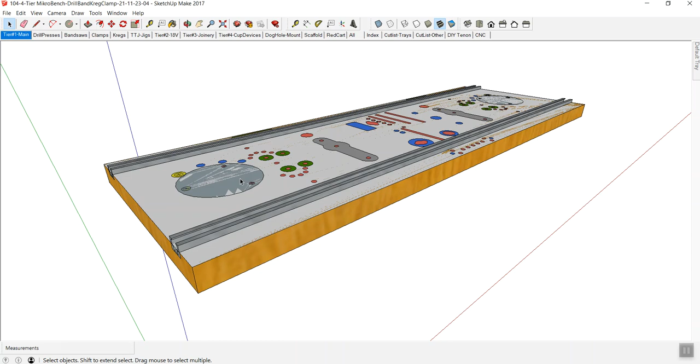So this is the board, or what looks like it's going to be the board that we're going to run on the CNC machine. This track, by the way, I'm going to hide right now. Okay, these are going to be the dados for that track. They're going to be done on a shaper, a separate machine. And then I'm going to hide the surface, the two-dimensional CNC run.

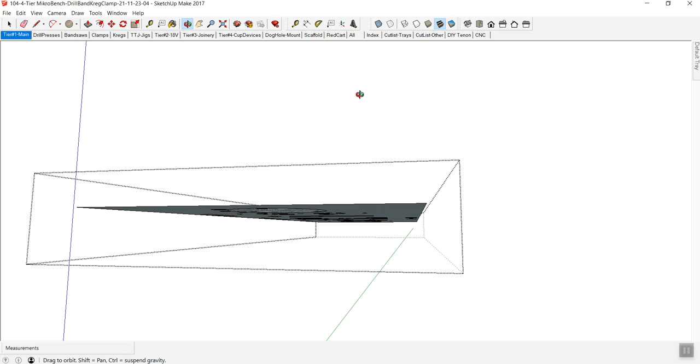You can see that this is really just a board. It has the two dados in it. Don't worry about the circles. Those are for references later on a drill press thing. But if you look at this again, now I hide the board itself. And so when I'm doing all this layout stuff to see where everything is going to fit, I basically keep this two-dimensional board going.

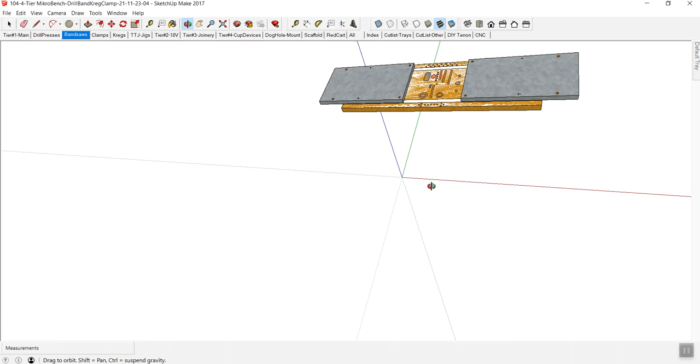And so when I do my layouts, like for this kind of stuff, these are the drill presses. I need to know where they're going to fit. I want to be able to show the bandsaw brackets, the clamps that are going to go on here. When I do all that, I like to be able to physically see the board, especially when I get into the bracketing underneath, basically the mounts that are going to be used for different mounting systems, scaffolding, toolbox mounting, and things like that. I want to be able to see the board itself.

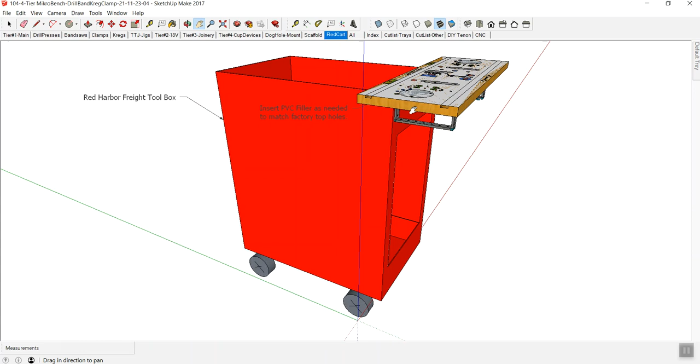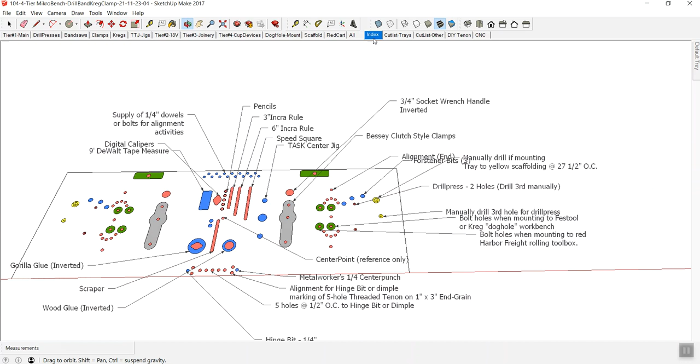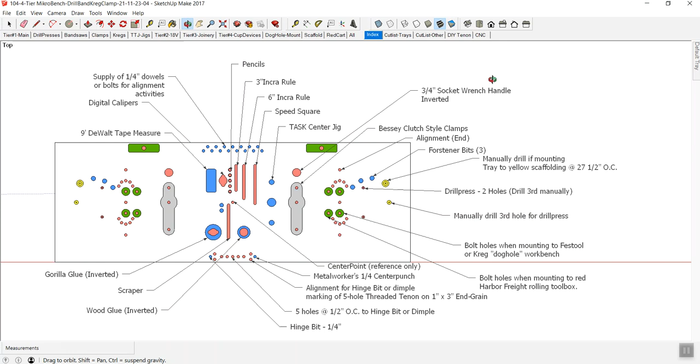But when it really comes down to the CNC part and over to VCarve, I just want a two-dimensional item. So this is an index. It's horizontal landscape mode because I can fit a lot more on it, left to right, and do all my notes. And this is more for the people using it, myself. But when it comes to the CNC, I have a separate group over here.

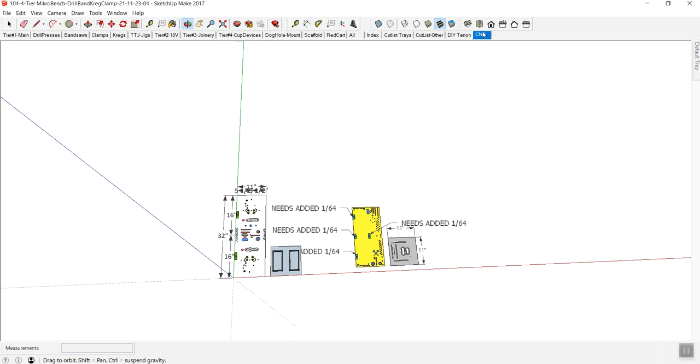So if I zoom out and I do view hidden geometry, you're going to see that I've got tons of stuff throughout this whole model. There's that bench over here. Here's some other stuff going on, but there's a lot of stuff out there. But when I click on this CNC tab, it hides everything else, and all that's left is this one group that has all my CNC stuff.

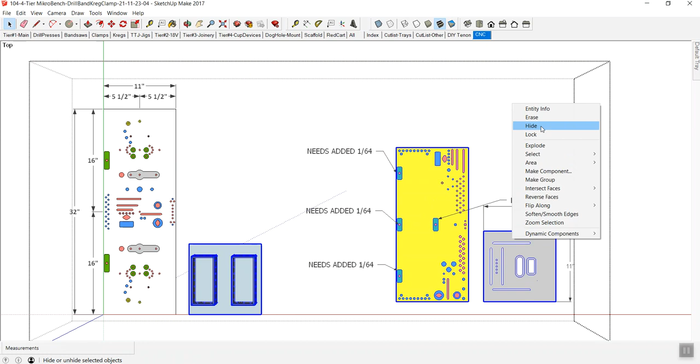Then inside that group, when I'm preparing for receiving it in Vcarve, I take even the things that are inside of there. So I'm going to control click, control click, control click, and then right click, hide. I do not need to hide the notations or the dimensions because those will not carry over to VCarve. Basically what I'm left with is this board right here, a two-dimensional thing. It's not a three-dimensional thing, okay? Because three dimensions does not work out well in Vcarve. This is my solution to the whole thing.

And if you notice, this board is 32 inches high, so the halfway point is 16 inches. So when I put that board on the CNC machine, the halfway point is going to be 16 inches that way, and then 5.5 inches that way. Those are just my own notations. Now I would do a file, save as. I do incremental savings, so I use some different formats for that, and that increment was 0.5. Now I'm going to go over to VCarve.

So I have basically a blank Vcarve screen. I go up to create new file, and the width of that board is going to be 11 inches. The height is going to be 24 inches because that's the capacity of the machine. Really it's 25 or 25.5, something like that, but call it 24. And even though the board is 32 inches, I have to tell it 24, otherwise Vcarve will scold me. And then I'm going to go with a thickness of 1 inch for the material. I'm going to say OK.

Then to bring that SketchUp file in, I'm going to go up to Import Vectors. I clicked on that, you can see the file right here, and I'm going to say open. When I do that, it takes a little bit of gyrating.

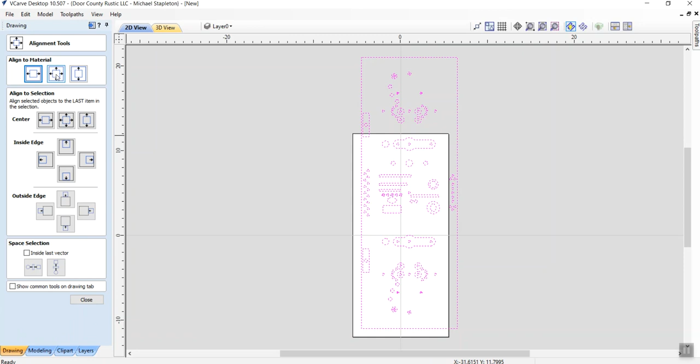So if I go over to Align Selected Objects and click on that, it pops up this separate window. I go to the center one up here, click on that, and now it took it and centered it — at least the 24-inch is centered on the 32. So that's really what I've got to work with.

The next step I would do is, you can see everything is selected right now, and that doesn't work very well, so I'm just going to click somewhere here. So now everything is deselected.

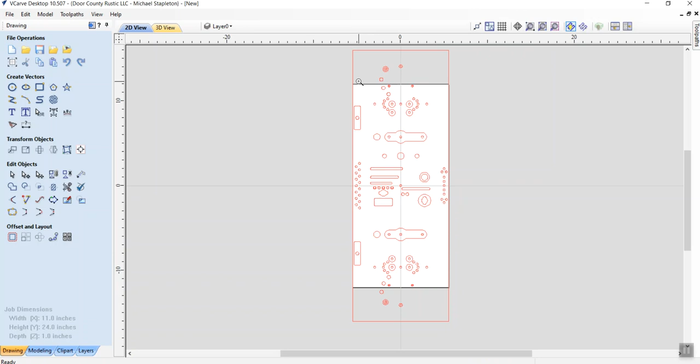Now to start focusing in on what it is that I want to do, I'm going to go up to zoom, and basically start with a little bit more than half the sheet. So now when I go in here, I can really see what's going on with everything.

So now, okay, well, how do I set up all those holes? Wow, that's a lot of cavities. This is where you go back by clicking down at the bottom of the screen.

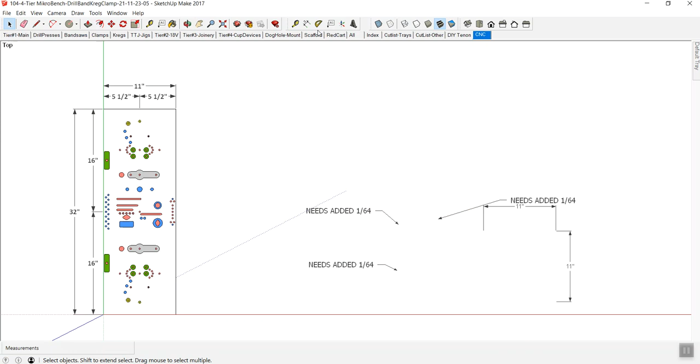I have a tab open for my SketchUp file, so you can look at the vertical version, which is exactly the same as what you have here, to help you with reference. Or you can go up to the index where it tells you a little more about that particular cavity, which will help set up what you want for depth, how many passes, and things like that.

So let's go to Vcarve. Let's get started. I always start with the center hole, which is right here. So let's zoom in on the center a little more. So I'm zooming on that.

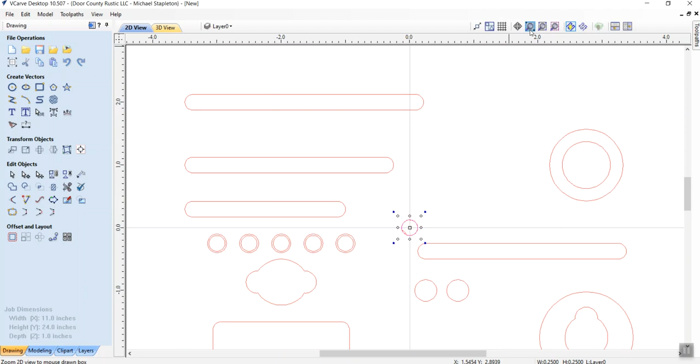Well, I have a center hole right here, and the only thing I don't like is I see that little thing right there, and there's something wrong there. That's not normal, that shouldn't be there. So let's get rid of that.

That's something that maybe carried over from before, so I'm going to get rid of that. You're not going to normally have to do that, but I do need to fix it right now. And sure enough, that was a little something that must have carried over from another hole. So I want to make sure I don't have that in there, otherwise that's going to be a problem later.

So I'm going to get rid of that. It's gone. I'll look at it through the X-ray, and now I'm good to go. So now I can go back to VCarve, and I've got what I need.

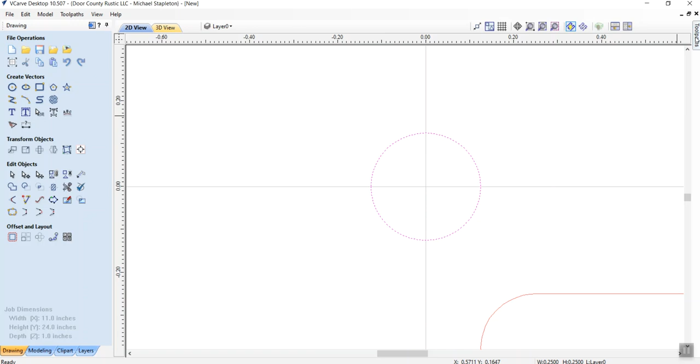Now this is that center hole. So I'm going to click on that, and I like to have a center hole of the whole sheet, so that if something goes wrong during my CNC run and I have to reset everything — the board or whatever, let's say the machine, the bit breaks or the machine jams up or something like that, who knows.

So I'm going to go to 1.00 on depth of that, and then I'm going to call that center pin at 1.00. I'm going to calculate.

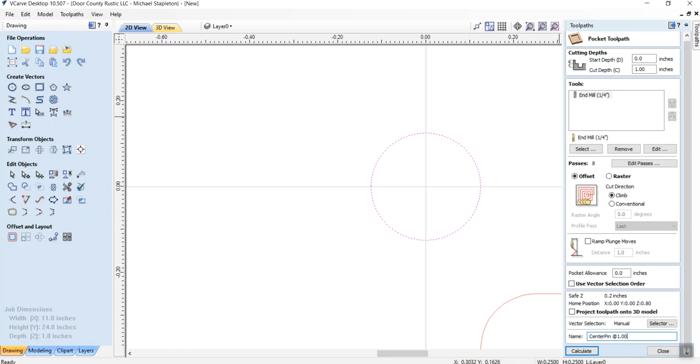It's going to automatically jump over there. It's so small that it's not even showing right there, but it is there. Like if I ran a preview of the toolpath, now you can see the hole there.

Okay, so then I go back to 2D view. It automatically jumps back to this really small view. So then I would go into, again, zoom into it.

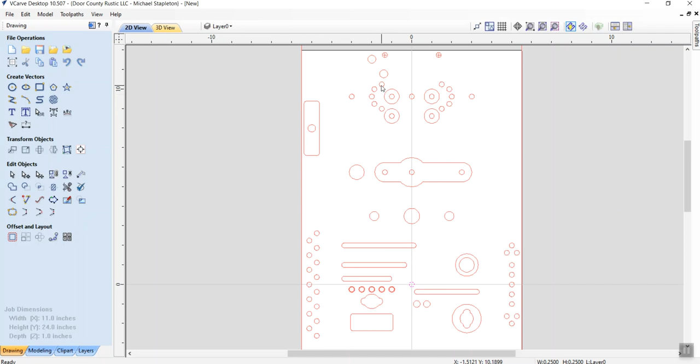Now I just need to start picking and choosing what it is that I want to work on. If I get too crazy, it gets tough to remember everything. So since I've got all these alignment holes, and I know those are all 1/4 inch diameter, I'm going to go ahead and zoom in even a little bit more. Okay, so I've got alignment holes, and I don't need these little X's in there.

I want to get rid of those. I'll go back to SketchUp later and get rid of those. You don't need those in Vcarve.

I use them a lot when I'm laying out the SketchUp because it helps me with the layout itself. So those would confuse Vcarve. You'd get a notice saying there's certain things that aren't going to appear.

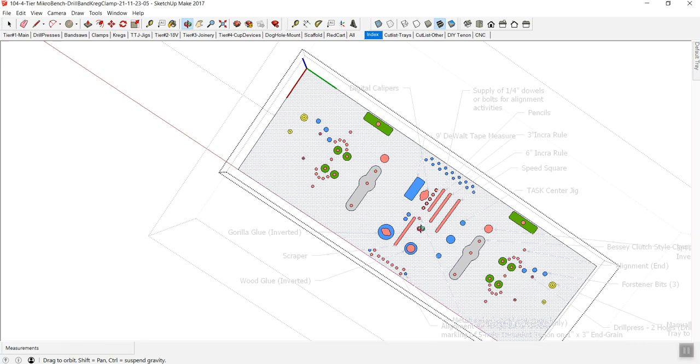So now if I go back to SketchUp and do the same thing, you can see those marks right there. I'm going to get rid of those so they don't carry over next time, if there is a next time.

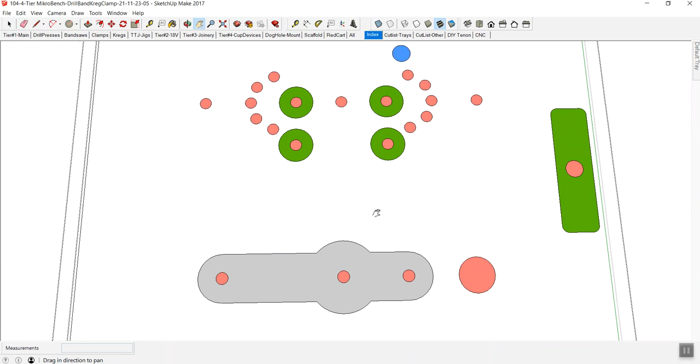Even though you use these little center point markers in SketchUp, you can see they're really helpful, like in here. I would recommend deleting them before you carry it over to VCarve. So even though I used those little center marks for the layout on almost all those circles earlier, I got rid of them. Now I go back to Vcarve, and let's just start at the top.

So I'm going to scroll bar up to the top. Again, these areas here, these holes, are not going to be on the CNC run. They're going to have to be done manually.

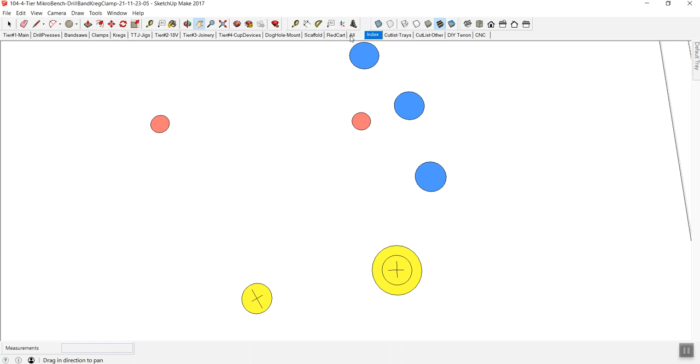But that is where I'm okay to leave the little marks, because that's going to help later when I go into my layout, my cut list, for when I get into this kind of stuff where I'm dimensioning things. Then I can use those to dimension where those holes are going to be. So that's helpful there. But for right now, we're not going to use those.

So I'm going to scroll down a little bit, and I'm going to start on all the 1/4 inch holes that I know of. Because the 1/4 inch holes I can run in Vcarve by using 1 or 2 passes. I don't have to do 8 passes because I'm using a 1/4 inch up spiral bit. It's basically just going to plunge right down in all those 1/4 inch holes.

So I'm going here, here, here. I'm shift clicking on all of those. Now these here are also full throughs at 1.0 inside there. So you can see I didn't select this. I did select the center because those are 1/4 inch. I did not select this because that's 3/8, and that needs more than 1 or 2 passes. That's going to need 8.

These marks here are for dimensioning later on. So I'm shift clicking, again, they are 1/4 inch. These are not 1/4 inch. Going over here on the side, I have a whole bunch of 1/4 inch holes, and they're all in alignment, so I can go ahead and shift and select. So those are all selected. And again, because I use shift, all these other ones up here are still selected.

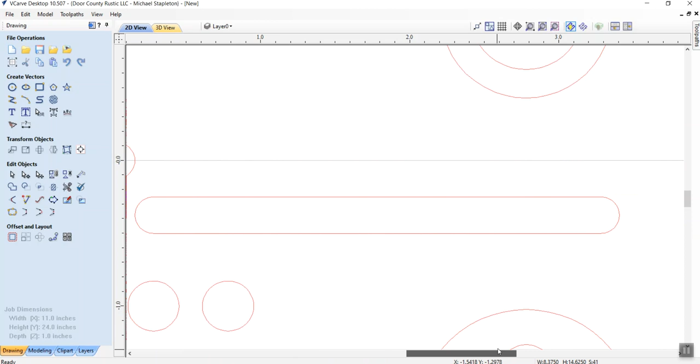And then I'm going to use my bottom scroll bar. Do I have any more over there? Not necessarily. Now I get a different view, I have to zoom to drawing. I'm going to click on the zoom again. Now I'm back to normal.

These are 1/4 inch. No, they're not. So I'm going to shift click. That unclicked it. Oh, did I lose everything? How about that? I did. All right, so shift, drag, shift, drag, shift, drag, click, click, shift click, shift click. That gets you irritated when that happens, but it's all part of the game, right?

Shift, drag. I got all those. Inside, these are tough to see. Inside, inside, inside, inside. Not the outside, but the inside. I'm not going to select these.

Those are glue brushes, and those would be larger than that size, larger than. Okay, now I get over here, and I happen to know these 5 holes are full throughs still, so I'm going to shift click on those.

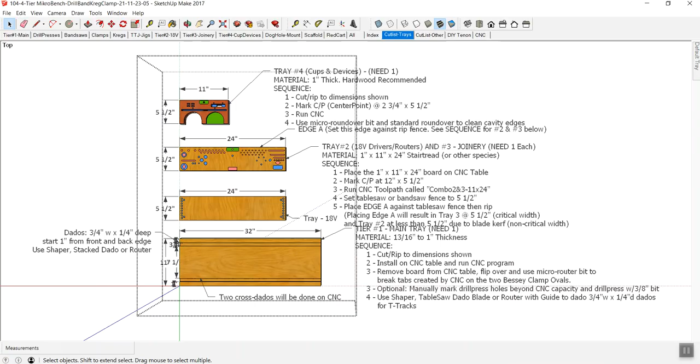But if I go over to SketchUp and I go to my index, and I'm going to zoom in on that, and I look at those outside holes, some of those are full through and some are not.

So these, because they're that orange color, those two are full through because there's going to be something underneath that I'm going to use for alignment. However, right here I want storage of a center punch, a metalworker center punch, and here I want storage of a hinge bit. So I do not want those to go full through.

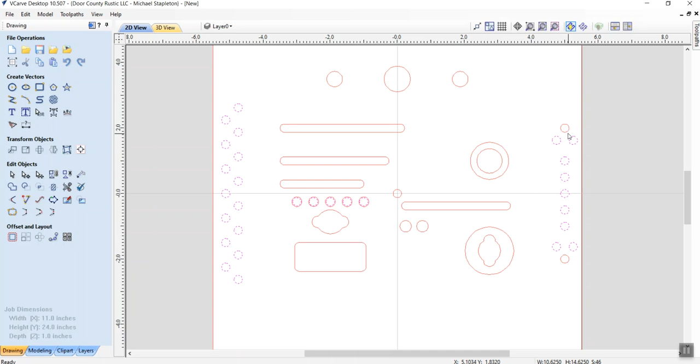So let's go back. Again, shift click, shift click, shift click, because those are full throughs, but I did not click on those. Now I'm going to have to kind of remember those as I get further.

Okay, now this is a repeat of above, so I can shift drag those three, I got them. Shift drag those, I've got them. Shift drag those, I've got them, but not including this whole outer, right? I can click, shift click on the inside, shift click on the inside, shift click on the inside, shift click, and then these two down here, shift click, shift click.

So without doing anything else, no clicking anywhere, because otherwise you'll lose it again, I'm just scrolling to see what I got and trying to remember, do I have everything? And if you recall, I already did the center point as a separate run.

So without clicking anywhere else, I'm going to click on Toolpaths, close. This one right here, I'm already set up at 1.0. Now this is where I'm talking about editing the passes. You don't need 8 passes, so I'm downshifting. Let's go 2, and I have an auto hide. So now I'm going to go down here and call those all 1/4 inch, full through at 1.00. Calculate.

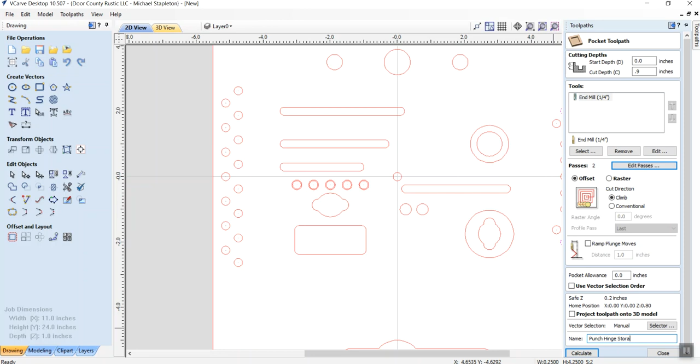And again, I don't need 7 passes, I can go with 2. And those are punch, and just call it whatever, punch hinge storage at 0.9. Calculate. So now I remember I've got those.

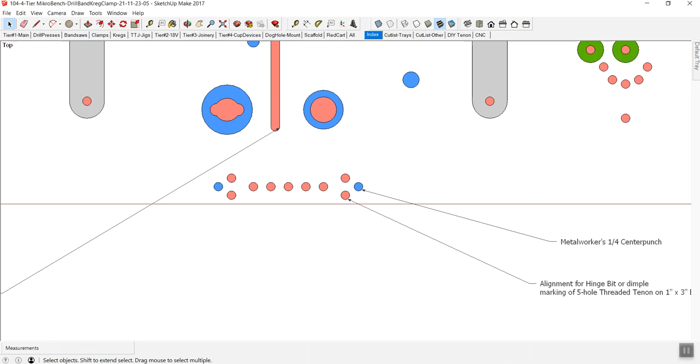Now let's just start up at the top again. I'm scrolling up. Okay, so now what I've got is, I'll go ahead and do some of the larger holes that are also full through. So I know this is a full through, and the reason I know that is if I go to SketchUp...

Actually they're not full through. Those are blue, and those are for Forstner bits. So the Forstner bits, I want to be able to stand up using the 3/8 inch shaft on them. So those are not full through.

So let's go ahead, I've got 3 of those over here, and then I've got 3 over here, and then I've got some other that are 0.9, 0.9, 0.9 because they're blue, right? I'm not going to do these yet because I'll show you why later. But I am going to do these. So I'm just kind of memorizing 3 here at blue, 3 here at blue.

Technically I could do this guy. So do I want to do that? Let's go ahead and we won't do him.

Okay, so again, here I've got my Forstner bit. Now this one is actually off the chart right here, so I might as well delete it because I'm not going to do that manually. I'll end up with 2 of those.

So this is where I sometimes make corrections to SketchUp while I'm in VCarve. I'm going to get rid of that guy, and I'm going to get rid of these guys. I should have known better than that.

And then now I can go back to VCarve. I already got rid of it there. So now I've got my Forstner bit, Forstner bit.

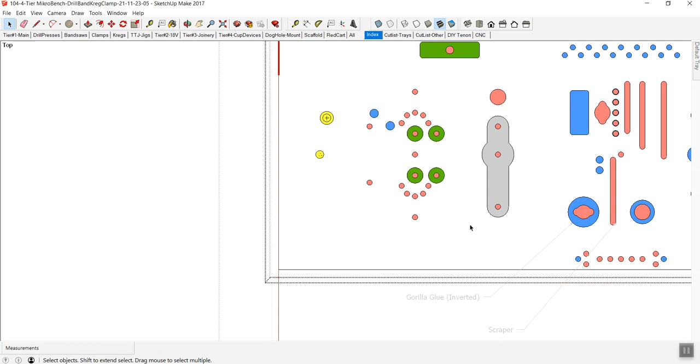What else did I have there? Again, it gets complicated, gets complicated. None of these, right? All right.

So let's go ahead and do those right away. So I'm shift click, shift click, shift click. And again, I should still have those others up there. Yep, they're clicked. That doesn't seem right either, you know. Trying to figure that one out.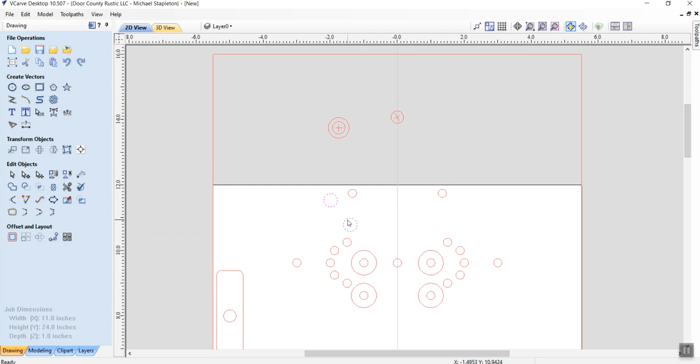Did I accidentally move something? I don't like that. Control Z. Yeah, how about that? See, I accidentally moved something when I was in VCarve, because that wasn't right. All right. So however I did that, I don't know. But those are correct now.

So I'm going to do a shift click, shift click, shift click. And I'm going to scroll back up, make sure I didn't accidentally do it again. I did not, so everything's fine. So again, that was an accident, but that shouldn't have happened. You wouldn't have a hole partially over the top of another hole.

And then I think these two are partial throughs. So let's just look at, yep, they're the blue guys. So shift click, shift click. Let's go down, I'm scrolling down a little further. How about this guy here? What is he? That is, nope, that's a full through. That's for a wrench. So really I just have the two that are down here left, which is this one.

Shift click, and then just to make sure, I'm going to scroll. I've got a couple there, a couple there, a couple there, and a couple there. Okay, so all of those holes are that one there. And then they are all for bits. So I'm going to do those at 0.75, just for grins. So it wants to do 6 passes, which I'll go ahead with.

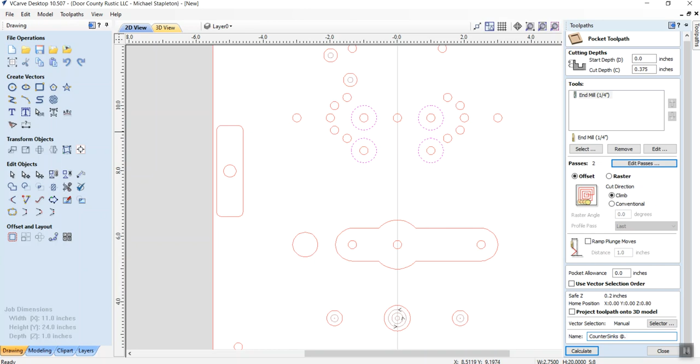These are countersinks at 0.375. And again, when I do the CNC run, I'll explain it later, but if it's hardwood, I'm going to slow down the speed right on the machine itself. I'm not going to slow it down here. That way I have the same settings for pine as I do for hardwood, except I could just tweak that adjustment on the machine itself. All right, I'm just clicking somewhere out here to see where we're at.

Now let's just think this through. Do I have these holes? Yes. Do I have these? Yes. Do I have all these? Yes. Do I have all these? Yes. Did I get this guy? No, I did not. This guy is a wrench. It's a hex, a socket wrench. And then I have another one here. Because I use those frequently, I like to have those handy. So I'll shift click. There's two of those. And those I do want to go full through because they're a handle.

And then by going full through, I'm going to go back up here to 1.0. Do I want 8 passes? Probably. Again, especially if it's hardwood. These are going to take a little while, but boy, do they ever come in handy. So this would be socket handles at 1.00.

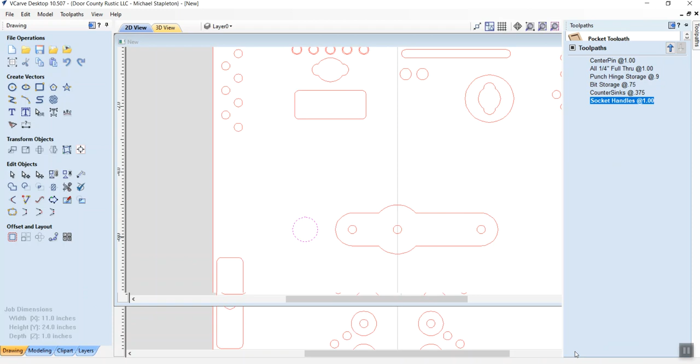Calculate. I go back to 2D view. All right, so I've got those. Now let's just start again at the top, scrolling. So I've got those. I already got these guys. I feel comfortable. I got these. So let's just go back up there and let's see what else we got.

Okay, so this right here is a mortise. Inside that mortise is a 3/8 inch hole. There's two of those on the job. So I've got shift click, and I'm going to go ahead and run. I could have caught those earlier, but I want those at full through, and those would be mortise holes at 1.0. Say calculate.

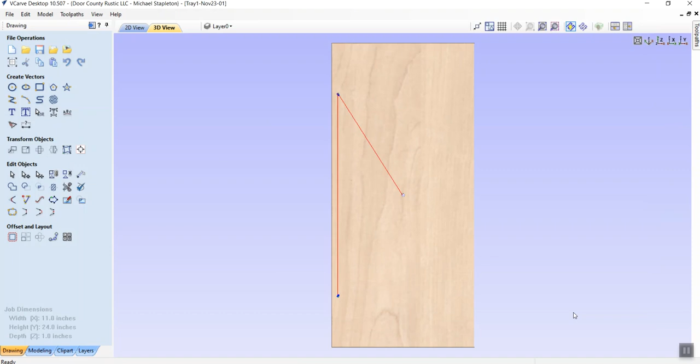Now it would not be a bad thing to do a file, save as right now so I don't lose everything, and this would be tray 1 November 23-01. And again, that way at least I've got everything saved in case I have a crash of some sort. So I didn't save the toolpath yet because I don't need to.

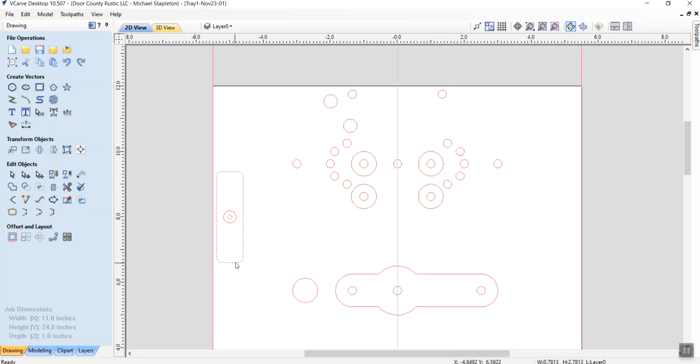But now, did I set those up? Can't even remember. Mortise holes at 1.0. Yes, I did. Okay. So now let's go ahead, since I'm at that stage, and I'll do the mortises themselves. So again, scrolling up to the top. So there's the mortise. I clicked on it. And now I'm going to do a shift click on the second mortise. And those I want to be 0.375.

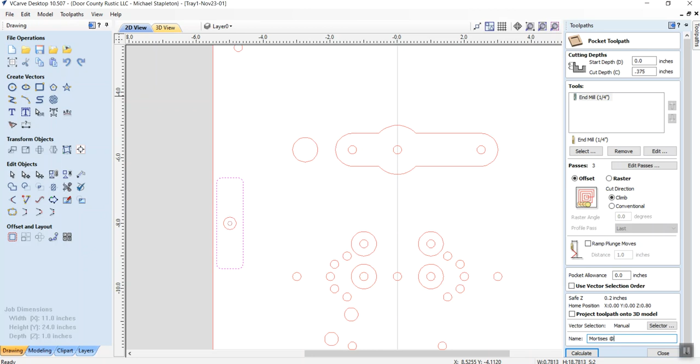And that covers the mortise itself, the tenon that's going to be going into there, the threaded tenon, plus it includes enough. The threaded tenon is a 1/4 inch, but there's also the GRKs, and so the heads of those need some space as well. So I found that 0.375 just seems to work. Do I need 3 passes? Probably. Again, especially if it's hardwood. So then I'm just going to say mortises at 0.375. Calculate. So now those show.

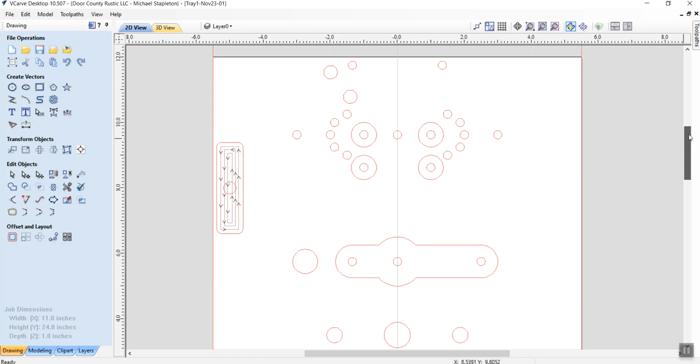Now again I'm going to click somewhere else. Go back up to top again. So again I got all of these. I got all of these. I got this guy here. I've got my mortises. So what's the next kind of group down? So then what I've got here, I already did the holes inside there, but these are for Bessey clamps. So I'm clicking on that, not a shift click. A shift click would have picked up some other stuff that I still had clicked earlier. So this is just a click on that, and then there's another one down here. So let's go ahead and shift click on that. So I have 2 of those ready to go.

Now this one, instead of using pocket toolpath, this one I'm going to use profile toolpath. So I do want that to go full through. So 1.0 is correct. Do I want 10 passes? Yes, I do, because this is probably one of the toughest on the bit, because it's just making a straight path all the way around, 1/4 inch wide. It's got wood on both sides. It's not going to eat out the center. You'll see that in a second.

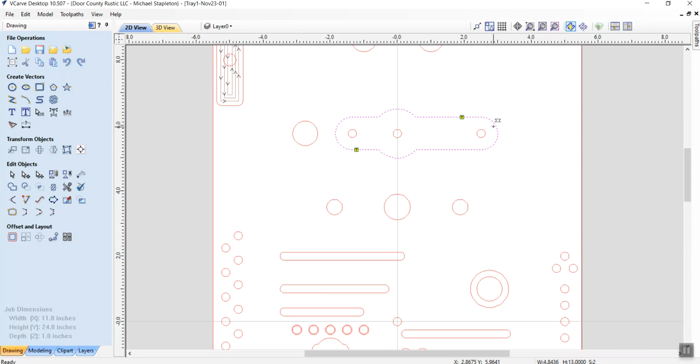But when you do the profile toolpath, there's this one down here that you need to click, add tabs. So I'm going to click on edit tabs. I say add tabs, and it added 2 tabs. Actually, it added them to both the upper and the lower. So right now I want to move that tab over a little bit because I don't like it here. You'll see that later when I do the cleanup. I'm scrolling down, and then I'm just going to drag that over to there. I just like the position better there.

Now again, I have auto hide. So now I go down to close, and I do have to scroll down to get at the area where I can name it. And then here I'm going to call those Bessey tabbed at 1.00. I'm going to say calculate.

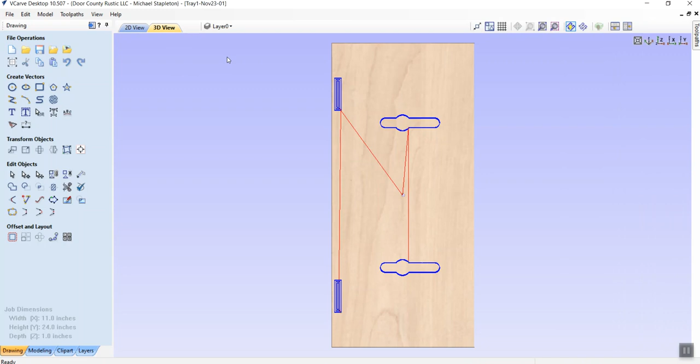All right, so now let's go back to 2D view, and then again clicking somewhere else just to basically deselect everything. Again, I'm starting at the top and I'm going to scroll my way down. Do I have all of these? Yes. Do I have these? Yes. Do I have that? Yes. Did I catch these? Did I catch those? I don't think I did. How about that? So those are for a task auto center finder. So I clicked, I shift click, and then I shift click.

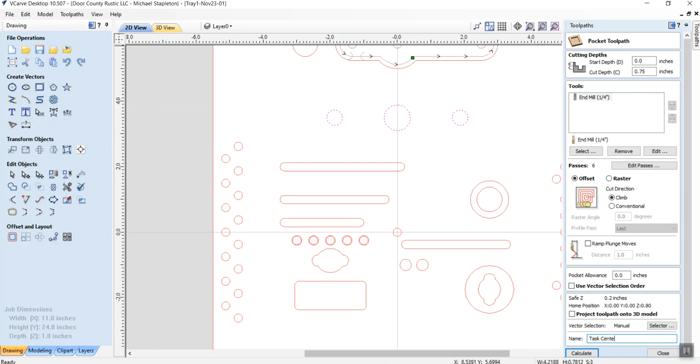Now these I want to go down. There's a lot of digging that goes on there. That's a lot of hole, right? So I'm going to click on that, and I'm going to go to 0.75 on that. I'm not going to go full through. 6 passes, yes. And then I'm going to call that task center at 0.75. Calculate.

All right, I got down this far, so now I scroll a little further. And then did I get all those? Yes, I did. Those are all those 1/4-inch holes. They're going to be for bits. Did I get all these 1/4-inch holes? Yes, I did. All right, now what do we have?

So I have slots. This is for a speed square. I'm going to shift click. That's for an Incra, the 6-inch one. This is for, I'm going to shift click on that, that's also for an Incra. This one is for a glue. Excuse me, not a glue, but what do you call it? That is for a scraper, a particular scraper. I'll cover that later, but that one's not going to go full through. So let's just stick with these 3 right now, again, because it's getting kind of complicated.

Do I want those to go full through? Yes. So I want to change to 1.00. Do I want 8 passes? Yes. Again, those are tough ones because those are just a 1/4-inch wide. There's going to be wood material on both sides of that bit, all the way through, up and down. And then I'm going to call those Incra speed slots at 1.00. Calculate.

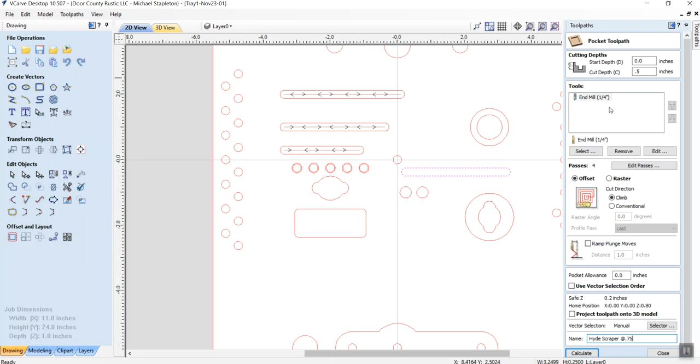Now that one, I happen to know it's better off not to go full through, so I'm going to put that at 0.5, which is plenty depth to hold the scraper into position. So then the pocket is going to be a Hyde scraper at, I'm going to go 0.75, and so I'm going to go up here and change this to 0.75. Calculate. Then I've got that. Got this. I already got that center punch.

Okay, so let's get these holes right away. Now those I do want to zoom in on a little more, and if you recall, those are pencils, and I already did the holes in the middle. And if you have to, you can go back to your Toolpaths and click on, like here, this one, and it should show there's a little dot in the middle. It's hard to see, but that tells me those have already had something going on. If I unclick this, the dots go away. So what I want is just the outer. So click, shift click, shift click, shift click, shift click.

As crazy as this may seem, pencils don't fit in a 1/4-inch hole. Pencils need a little bit larger, so I made those a little bit larger in SketchUp. But the tip of the pencil is so long that by the time you stick them in the wood, the pencils tip over if they have a tip on them. So that's why I did a 1/4 inch hole full through earlier. The tip of a sharp pencil will go all the way down through the bottom, but the rest of the pencil can't make it because that 1/4 inch will stop them.

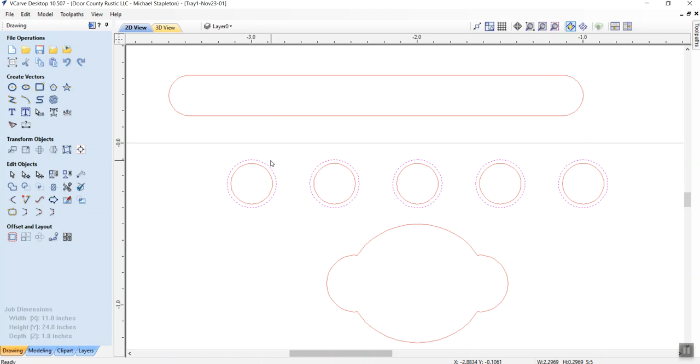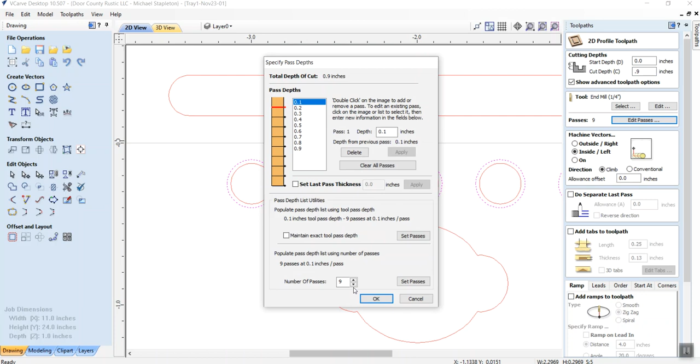But now we have the outers, and on those I have two options here. I can use this here, so let's go ahead and do that. So basically I have a profile type, and I only want that to go down, let's go to 0.9. What the heck. All right. Now that's going to do the inside only, which is fine. And I don't need any tabs because I already have a hole in there. So when this bit goes down in there, there's nothing really going to resist. So I can change my passes on that. Let's go to 3 passes.

So it's basically going to go down about 3/8 of an inch in a hole that for the most part already exists, and it's just going to carve out the outer portion of that on each one. That's kind of fun to watch. So let's do it that way. The other way we could have done it is a full through using the other method, and then again I could have reduced the passes because most of the meat is already gone. So on this one it's going to be pencil outer, let's just call it pencil rim at 0.9.

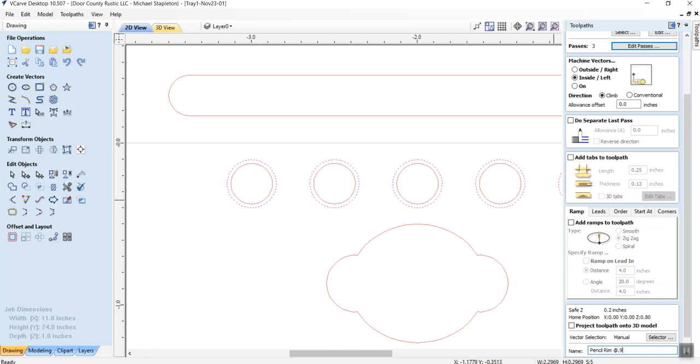Come on, Mike, 0.9, there we go. And that, I'm going to have to scroll down a little bit to get at it and say okay. There's my toolpaths. Back to 2D view. Now again, I'm zoomed in quite a ways, so I don't like that. I'm not seeing enough, so I'm going to click on view, zoom to drawing. Maybe there's a better way to do this. And then I'm going to go there and pick up where I left off, which is right down in there.

Okay, so I got those outers, and you can see there's some stuff going on there now. I already got this guy. Did I get the caliper? No. Okay, so these guys here, I'm going to kind of place them somewhat in the same path. So I've got, that's a caliper, a digital caliper. It's going to go full through. You can see the little nubbies that are on the caliper.

This is glue, the tip of a glue jar, and I clicked on it, but I didn't shift click. So because of that, I lost this guy. So now I'll just go back and shift click on him. So I've got this guy inside, and this is Gorilla Glue, that goofy shaped tab. So I shift that. So I've got 3 of them in there. So let's just go ahead and set that up. I want those at 1.0. And do I want 8 passes? Probably. Might be able to get by with 7, but you know, got plenty of time.

So this would be glue tip and caliper at 1.00. And in fact, I'm going to call those inner. And you'll see why in a minute as I calculate. Got those. Now remember, I've got the inners already done of those.

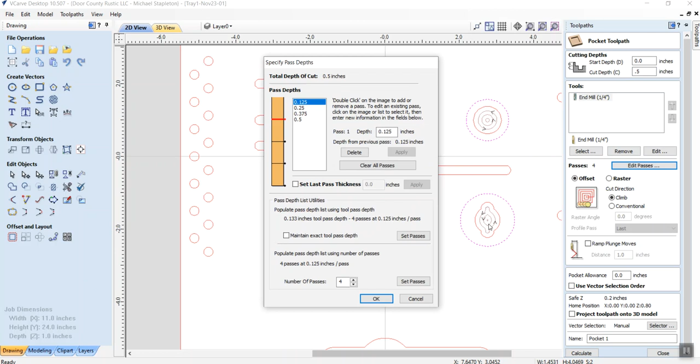So the glue, let's do that right away. There's my glue. That's wood glue, conventional. This is Gorilla Glue. And on those, I have already got the inside done. So I still need to use this one. But I'm only going to go down, let's just say it's for the cap, so let's go to 0.5. That should work. And then passes, again, a lot of the meat is already cut out from the inside. This is a little risque, but I'm going to go to 3 passes. I can make that decision after I see it run.

And these would be glue outer at 0.5. I could go deeper, but it just takes longer and you don't need all that depth. These will hold the glue upside down. So I've got those guys. Now I'm still in this range here. This guy here is a 9-foot DeWalt tape. It fits like a glove. So that one I'm going to go to 0.5 is plenty. Edit passes, I better stick with 4.

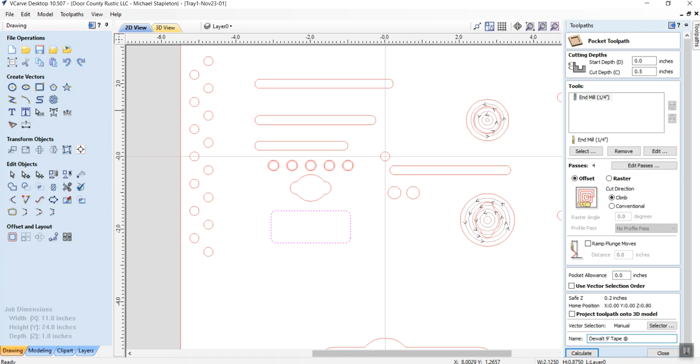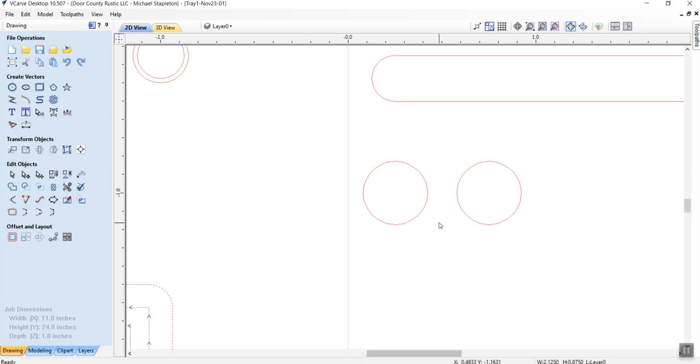And this would be the DeWalt 9-foot tape at 0.5. Again, I could go deeper, but it just takes more time to run the CNC, harder on the bit, the whole ball of wax. Okay, so do I have everything in here? Yes. Did I get the glue brushes? Can't remember, right? So I'm going to zoom in on those. And those glue brushes, they're larger than a 1/4 inch.

So down here I have storage, bit storage, countersinks, socket handles, more. I don't think I did those, because if I clicked on any of those, do they light up the center? No. Up, how about that? There it is, bit storage. Okay, so this one right here lit that up. So I already did those, so I don't need to do them again. You can see if I click on bit storage, they're under bit storage even though they're glue brushes.

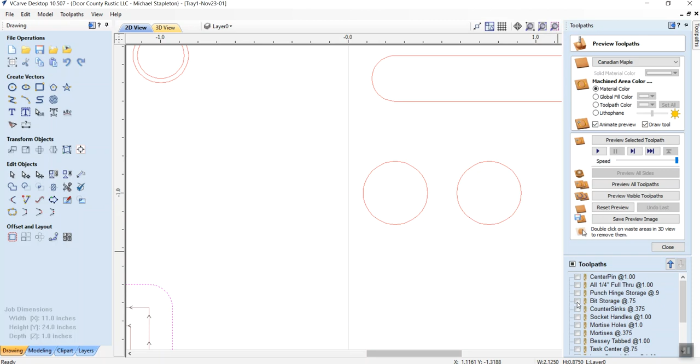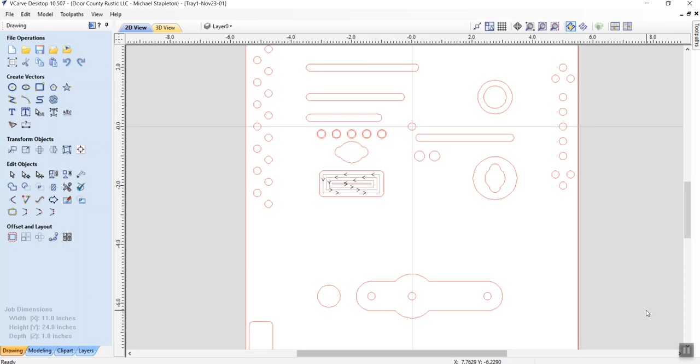So now I do need to go back up to view, zoom to drawing. And again, I'm going to zoom down into that range there. Those are those 2 glue brushes. In fact, I could go back to bit storage, and rename it bit and glue brush at 0.75. Enter. Okay, so now it reminds me later that I did already get those.

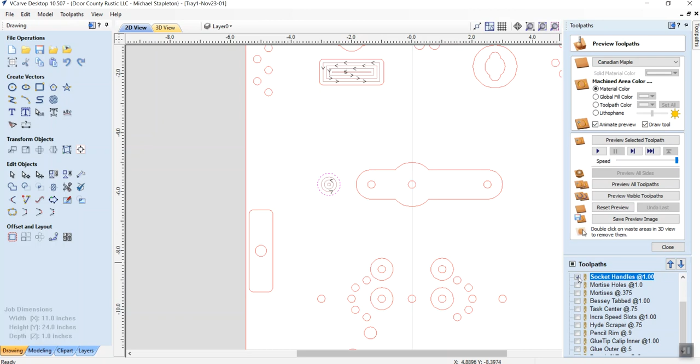Now we'll go down to here. This was that socket wrench that we already did earlier, I'm quite sure. So let's just go ahead and check. Do I have socket right there? I click on socket and you can see it's lit up, so it already is scheduled to go. In fact, there's the arrows showing the path it's going to take, so I'm going to unclick that. I'm clicking here to get rid of my... Now let's go back down here.

Did I get everything? These are all the 1/4 inch holes from earlier, 1/4 inch inside. Again, if I'm not sure, I think I know what they are, but let's just double check. I think I had some countersinks, and that was...

Where are the countersinks? Okay, there's my countersinks. Yes, okay, the countersinks are already done. I'm going to unclick that. These guys I know I did with the 1/4 inch. These I know I did. And then these guys here, they're the bit storage. They're the Forstner bits. And just to make sure, let's just look at,

where do I have those? Socket handles, mortise, holes. Well, let's just double check. I'm clicking on it, unclicking. Mortises, unclicking. Bessey's, no. Task, no. Incra, no. And again, you can see it's not the Hyde scraper, it's not the glue tips, so it's possible that I did not get those.

Center pin, punch storage. Oh, there they are. Okay, so they were under bit and glue. They showed up right here, those insides. You can see that. So I did already have those. Now again, it wouldn't have been the end of the world if I had created a new toolpath. It would just basically re-drill the holes every time.

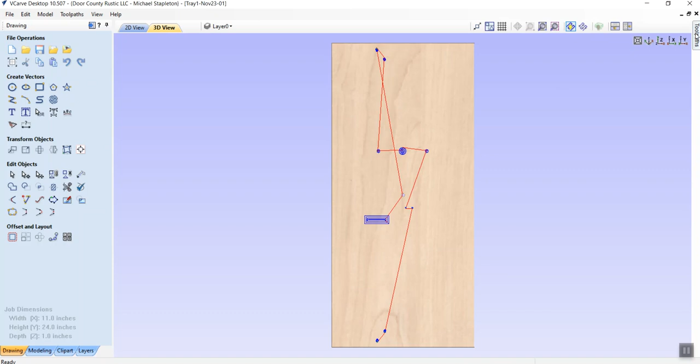All right, there's everything, and I'm going to unclick that or click it. So everything is now unclicked. I'm going to click it. Now everything is clicked, right? Now I'm going to go to preview visible toolpaths, and it's going to go like crazy. I had the speed set quite high because I wanted the preview to go fast. So right here you can set the speed, and I had it set up to the maximum. Basically, right now I just want to do a visual of, does it seem like I have everything?

And I don't like to use the zoom in on this one because it seems like the zoom changed it into a 3D mode, and then I don't know how to get it back to 2D. So on this one no problem, but this one it doesn't seem to work. Okay, so visually I've got my two at the end, though there is a matchup there. There's a matchup here with that. I've got my alignment stuff here with the pin here.

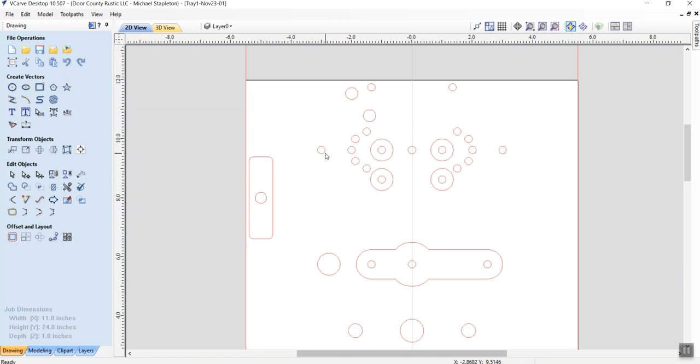And look, am I missing one right here? I think I might be missing one. Because I've got one down here and here and here and here, but it's possible that it's just not showing because of the way that it shows. So do I click on zoom, or do I go back to 2D view? And that was the one I'm talking about missing. And I know that those are the 1/4 inch holes. So task center, Incra, Mortise, let's go up to 1/4 inch holes.

There we go. So I click on 1/4 inch holes, and then if I zoom in, it's capturing. I can see a little dot in there. Let's zoom in a little further. Okay, again, you can see the dot in there, but there is no dot in here, so I did miss that. Now I'm going to fix it without causing too much trouble. Zoom to drawing. Now I'm going to zoom into that area up there, so I have reasonably good focus. I have a dot, a dot, a dot, a dot, but not a dot here, right?

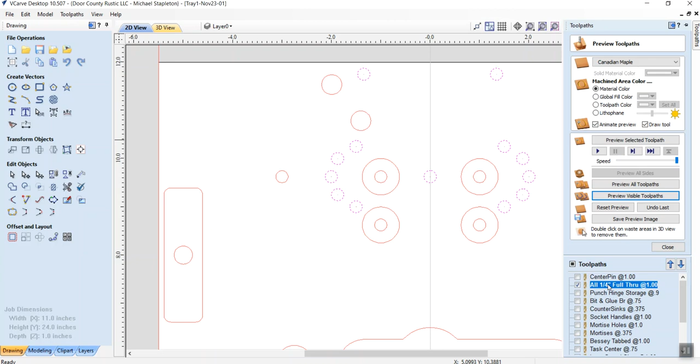So now I go back to the 1/4 inch right here. I'm going to click on that, and right click, edit. Okay, so I'm not doing anything else. All of these are selected, you can see that, but I'm going to shift click on that one. So now that's included with all the rest. Toolpath, go down to calculate. Now I can just double check that.

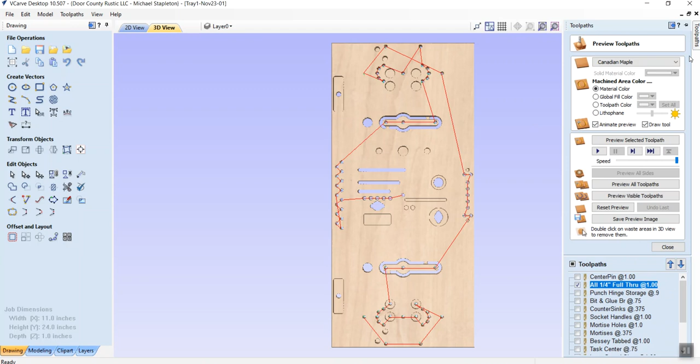I'm going to reset the preview, and on this one I'm going to deselect everything. I'm going to select all 1/4 inch holes, and I'm going to say preview. So see, now it showed up there. In fact, there's all the other 1/4 inch holes as well. You can see where they all are. I have 3 here, is that correct?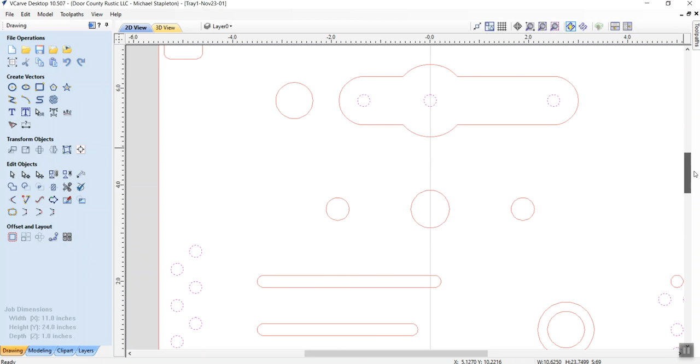Yeah, those are the tabs inside of the Bessey. So let's go back here. I'm going to reset the preview, click on that so it selects everything, and say preview visible toolpath. It's running everything. Now you can see that missing hole is there, so it matches up.

Again, this is just a visual. You have to know the drawing, but you can always go back to SketchUp to look and see what's going on, or go to the CNC run, the vertical version. In SketchUp you can zoom in and see if everything looks okay.

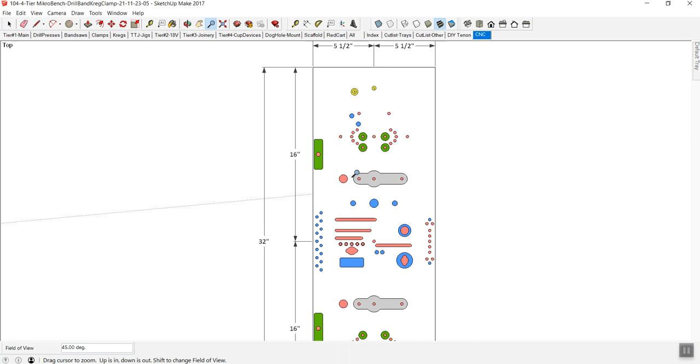Do I have those countersinks? Are there holes in the middle of those? I don't know if there's holes in the middle of these. That bothers me, so I go to 2D view, and yes, there are. They just weren't showing up on the run.

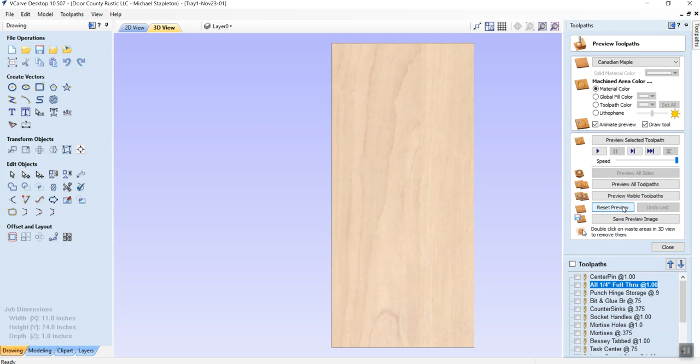So let's just do that again. Let's just do the quarter inch holes. I'm going to reset the preview, select quarter inch holes, and say preview the toolpaths. Is it doing those holes, which should be the counter bores? It should be inside those counter bores.

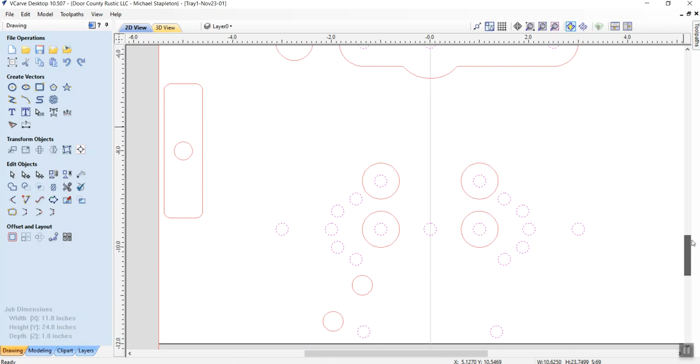And this is not doing them. Yep, it's doing them down below, but it's not doing them up above.

Rather than fooling with all of those, if I have to double them up, I double them up. So I'm going to go to those four that are not showing. Shift click, shift click, shift click. Then I'm going to set up a separate toolpath for them. Again, they may double drill. I want those to go full through.

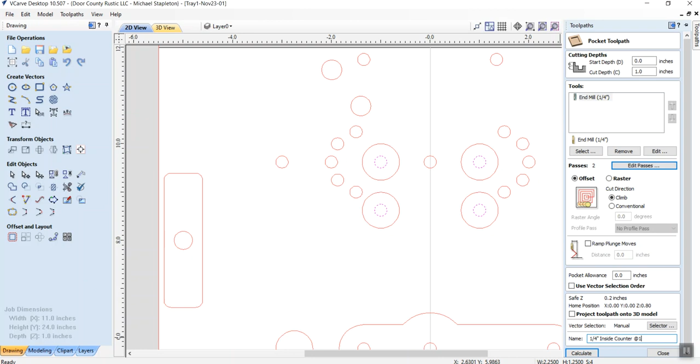Those are quarter inch holes, so I can edit the passes, go down to two, and say quarter inch inside counter bores at 1.00. I'm going to say calculate.

Okay, so now I'm going to have those. I'm comfortable with that. But what I'm going to do is take this one, since it really applies close to these up here, use the up arrow, click, click, click. It's constantly sending it up. There, now it's right underneath there.

Later on, if I decide I do have those holes in there after all, I can go ahead and delete that. So let's click them again. I'm going to reset preview, click on here, preview visible toolpaths. You can see why you really do want to look at the preview.

Okay, and then I've got my three of those guys. I have my holes here. I have my Incra. I have a partial here. I have my glue brushes. I have both holes for the glue. I have all these guys. Now I have those partial throughs.

Those are for the bits. There's a partial through right there, a partial through right there for the bits. These are all full throughs for bolt storage, my mortise. And now you can see these holes show inside the countersinks where they didn't show before, just like they show down here, they're good to go. These are my alignments and some other stuff that's going to go on below. So I'm comfortable with that.

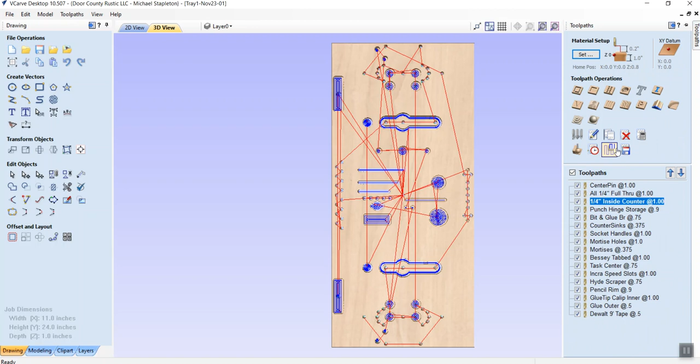Now I'm going to do a toolpath. Click on that, close, go to the Save Toolpath icon, click on that. Again, I'm making sure that all these are selected, which they are. Like if I had made a mistake and needed to rerun just one part of it, you can actually go in and deselect all of those.

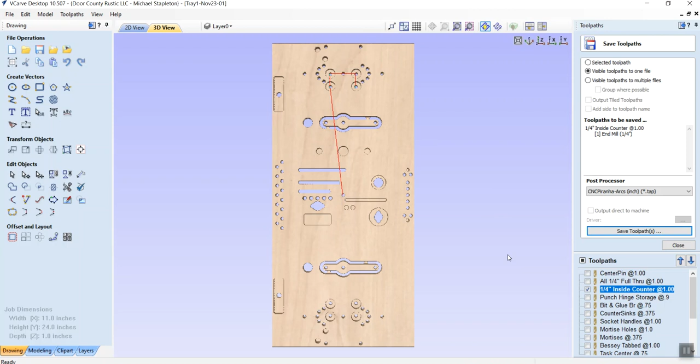Before you take that board off the CNC machine, you could click on just this one and save that as a separate toolpath. Since the board is already in the machine and you have that center pin, even if you took it out and had to put it back in, that's why I do this center pin here, so you could put it in, align your bit into that existing hole. Now everything's aligned, and then rerun, let's say in this case, those four inside holes, and you'd be good to go. But we don't want to do that.

We want to do everything. So I'm going to click in on that, again scrolling down to make sure they're all clicked. Save the toolpath.

And this I'm going to call tray one November 23-01, which may be the same name as the other file up here, but it's not going to hurt because it's a tap file. So if I'm worried about it, it'll warn me.

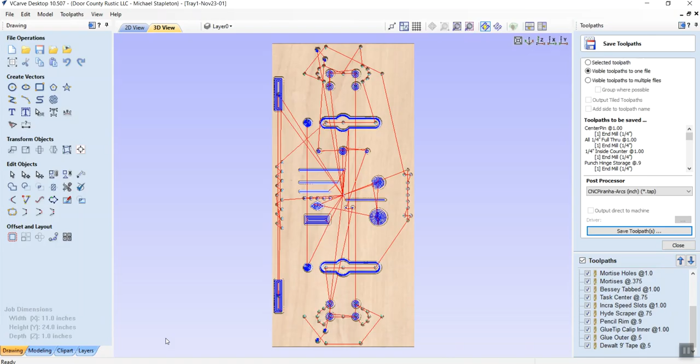Okay, so now I have the tap file saved, and because I made a couple of changes, I'm going to save as. I'm going to save the actual CRV file. Again, it's going to warn me. Say yes.

And then I made a couple of changes to the SketchUp file, so I do want to go back and save that file, save as, and it's a slightly different version. So I up it incrementally up to 6, say save. Now I have that file ready to go.

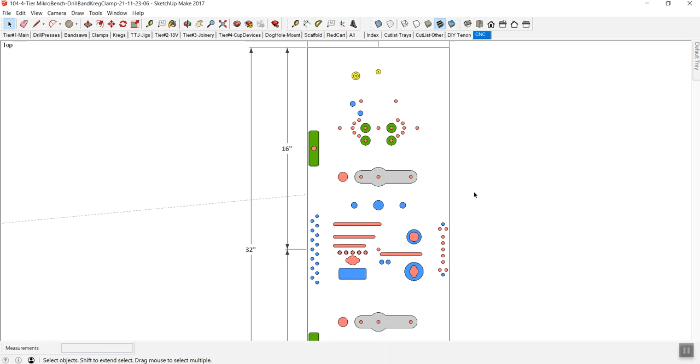Now, if I go into Outlook - I won't do this here, but if I go into Outlook, I'm going to send myself the SketchUp file. By doing that, then I can pull it up on my Android device when I'm out in the shed. On my Android device I'll open up my email, import that file, bring that SketchUp file in, and then I'll have access to that.

So when the CNC is running, I'll be able to look at what we see right here. I'll be able to zoom in on it while it's running and say, okay, is it doing everything it's supposed to do, and so on. So that's how I would transfer or import a SketchUp into a VCarve.

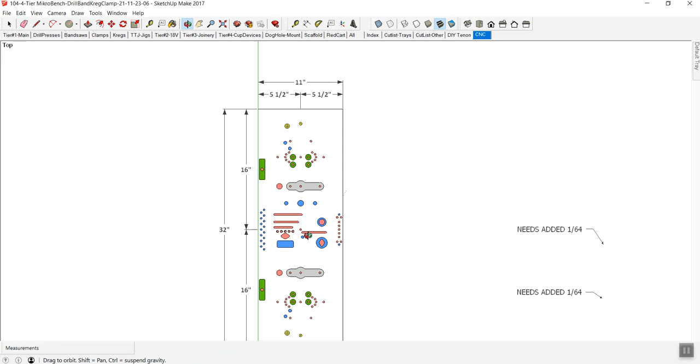So it's preparing the SketchUp file before you go to VCarve. Again, a huge key to that is doing 2-dimensional rather than 3, even though this is eventually going to be a 3-dimensional item, which is the board, right? And again, I cheated - this is just an overlay. I do not use layers. Maybe layers would work, but I really like this method of doing it.

In fact, this circle right here is for a drill press. That's not even part of anything. That's just to remind me that that's where the drill presses are going to go.

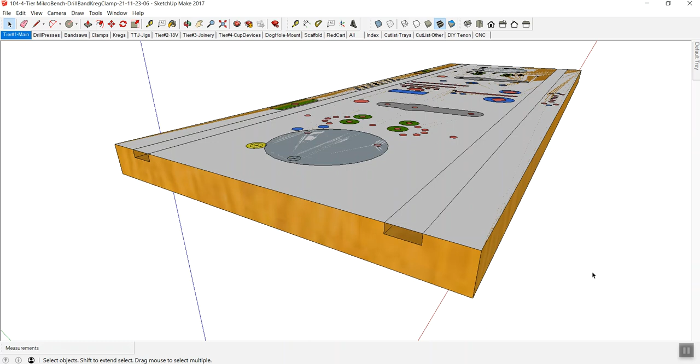Then the last thing I would do is, when I'm in VCarve, I would go right here into my documents. If I look down here to the micro workbench, what you're going to see here is the tap file for the tray that I just saved at 7:54 a.m. Now that's going to go onto a thumb drive.

And so that I also have a backup of my SketchUp, I'm going to click a control click, so I've got the SketchUp file included in that. There's no reason not to keep the CRV file on a thumb drive for a while as well, just as additional backup. So I now have 3 files.

I'm going to right click, copy, and then I have a thumb drive in my pocket here somewhere, I think. You can't see me, but I'm looking through my pockets, and I found one - a thumb drive - and I'm going to stick it into my computer, which you cannot see me doing. You might have heard that part of it.

It's pulling up a Memorex USB, and on that Memorex USB there were already some older versions. Now I want to delete those, because otherwise when you get into the CNC machine it's going to show the tap files that are already in there, and it just becomes confusing - like it's going to show tray November 21, and it's going to show something else, a rerun. Rather than having confusion there, because it's really like a DOS screen and not very user-friendly, I'm going to delete those.

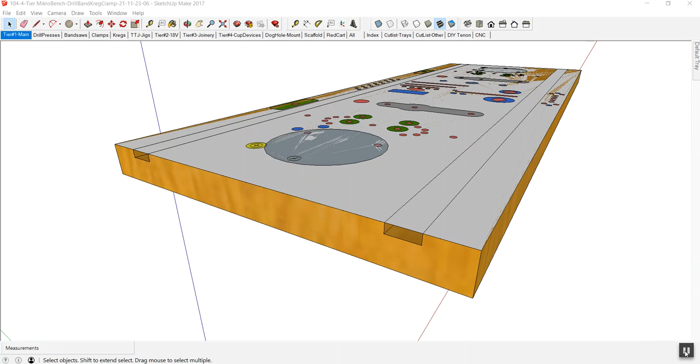Now the rest of this will happen in the shop itself. So hey, thanks much - long video, but thanks.